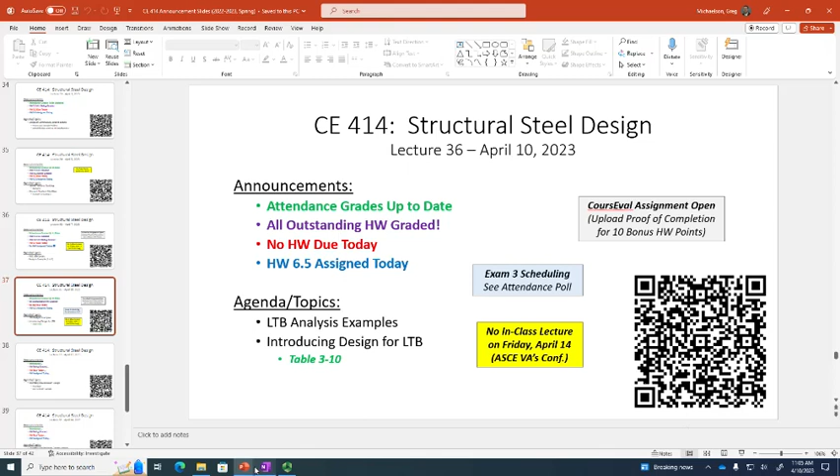Any questions? All right, so today we're going to continue our discussion of analysis for lateral torsional buckling. If you recall, what we left with last time was this flow chart we developed, and the flow chart is essentially this plot represented in equation format. So what we do is determine what zone we're in.

Based on that zone, we can compute the capacity. We've already done zone 1 problems for a long time now. That's the plastic moment, that's what continuously braced beams are, it's just phi Mp. Zone 2 is what we did last time, and today we're going to have an example on zone 3.

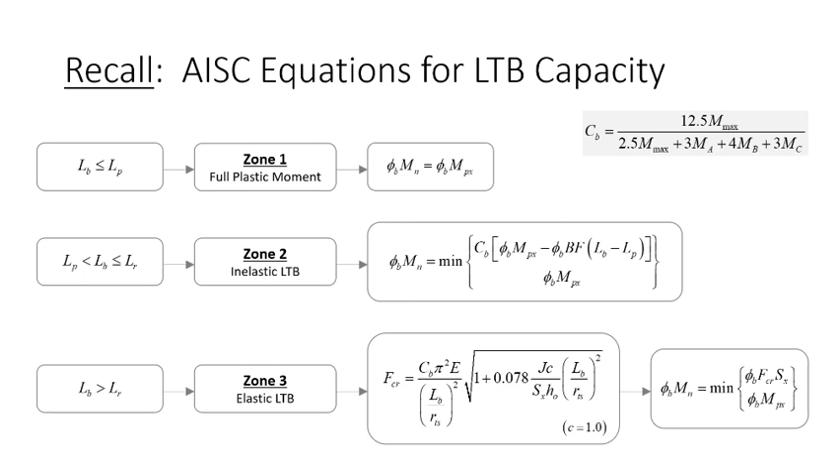Now, one note I did want to mention, and this is kind of important for conceptual understanding, is a note on LTB analysis about a beam like this. So this is a more intricate beam, there's a lot going on with this problem. If you look, I've got a beam that's overhanging, and if you notice, I've got 4 braces.

So this creates 3 unbraced segments. For each of these unbraced segments, I could have a different Lb, I could have a different Cb, and I could have a different maximum moment within that segment. I'm just using this as an example that in general, you could have a beam with multiple segments where this is the case.

So if each segment has a different Lb and Cb, then each segment has a different phi Mn, and each segment has a different Mu max. So for analysis, for evaluating that beam, you need to check all of them.

What you need to do is draw the factored moment diagram for the entire beam, compute the phi Mn for all the segments, and basically compute an efficiency or performance ratio for every segment. Now, whichever one governs is the one with the largest performance ratio or largest efficiency. But from an analysis standpoint, you need to look at all of them. Fortunately, in reality, most engineers try to exploit symmetry.

So they try and look at problems that have symmetric bracing and symmetric loading and things like that, to where you can avoid having to check all of them. But it's not unreasonable to have a beam where you might have to check 2 unbraced segments. That's not outside the scope.

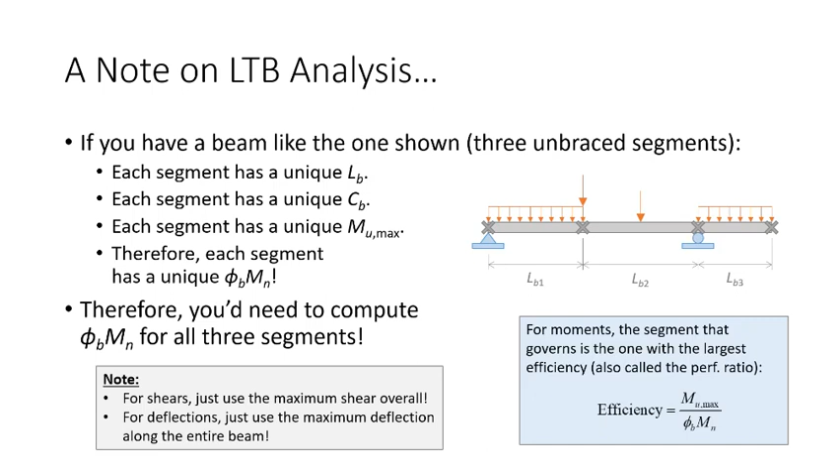Okay, what I want to do is sort of close the loop on computing capacity, and I want to look at a problem that's ultimately going to be a zone 3 problem. So I want to look at a W14 by 61, and I want to determine the flexural capacity for these situations here.

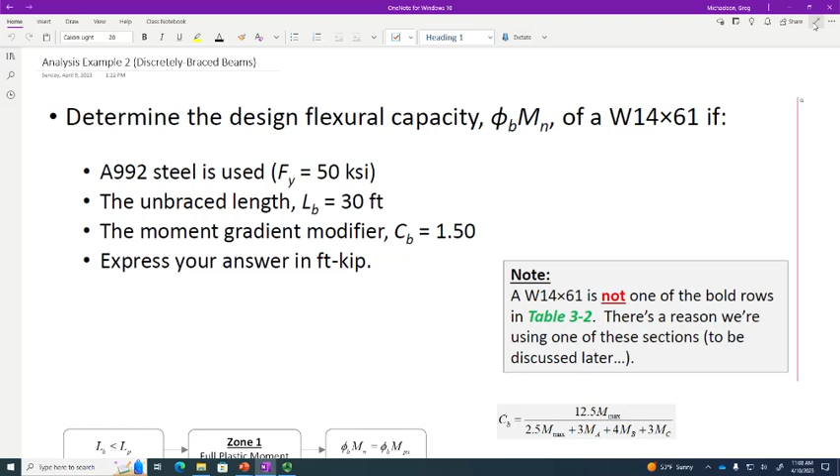So I want to look at it if we have A992 steel. I want to look at it if we have an unbraced length of 30 feet and we have a moment gradient modifier of 1.5. Now, one thing I'll mention here, let me pull this up.

One thing I'll mention about this problem is that in order to do it, we're going to need to look up several properties in Table 3.2 in the ZX charts. And I'll go ahead and tell you that the W14 by 61 is not one of the bold rows, okay? There is a reason for that. I want you to be able to get used to looking through Table 3.2 for sections that are not bolded. That might not make a lot of sense right now. It will later, and you'll see what I mean.

So we've got A992 steel, which means we can use Table 3.2 to look up LP and LR and things like that. Let's go ahead and do that. Let's go to the ZX tables and let's see if we can find the W14 by 61, and see if we can start to glean some data from this section.

So specifically what I'm after right now, let me be clear, is I want to determine the zone. So I need the LP and the LR for the W14 by 61. LP is 8.65 feet. LR is 27.5 feet. Okay, so let me write that down.

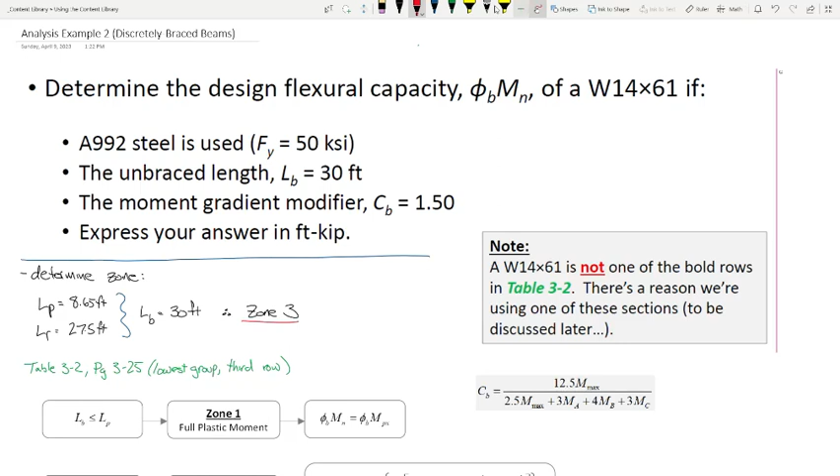Okay, so in order to compute the capacity, let me kind of make this a little easier to navigate here. So let me scroll down. So here's the flow chart. I thought, what the heck, let's just put it all here in the notes so that they're all there. So we have zone 3.

So in order to compute the capacity, we first need to compute this, okay, and then we'll go through and compute phi-mn. So this is a little bit of an involved expression, and unfortunately there's no way around it. Like if you remember, the LR equation was kind of nuts, but we don't ever have to really compute LR because we can just look it up. But this we can't really look up, we have to just get through it, okay.

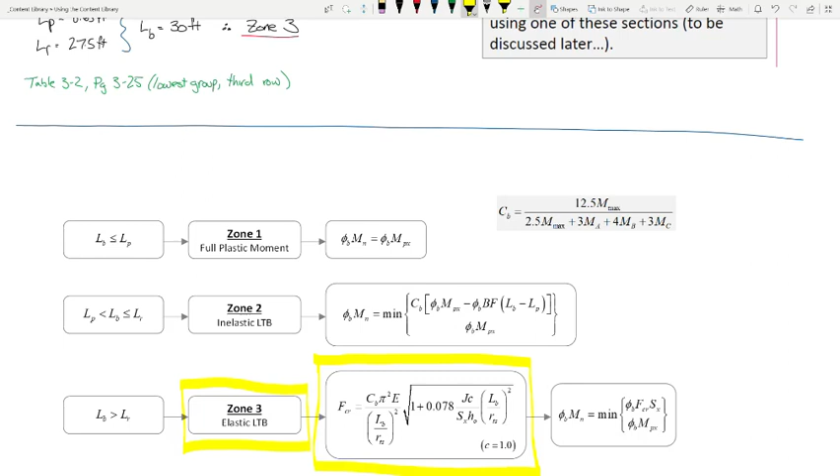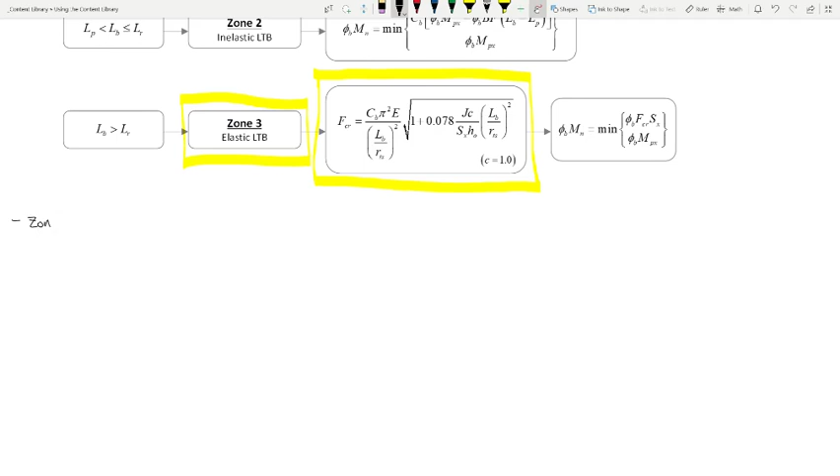So in order to compute the capacity, we're going to need a few things. So let me scroll down here, and let's look at zone 3, elastic LTB capacity.

Okay, so we're going to need our CB value, which we were given. Our CB is 1.50. Let's go through the equation. We're computing FCR, which equals all of this. Let's start writing down everything here and see what we need.

So we've got CB, pi squared, we know pi, E. We need E, E is 29,000 KSI. We do need LB. LB was given in this problem as 30 feet, but we need to go ahead and convert that to 360 inches.

And everything else that we see here is a section property for a W section. So what we need is RTS, J, SX, H naught. And all of this we can get from table 1-1.

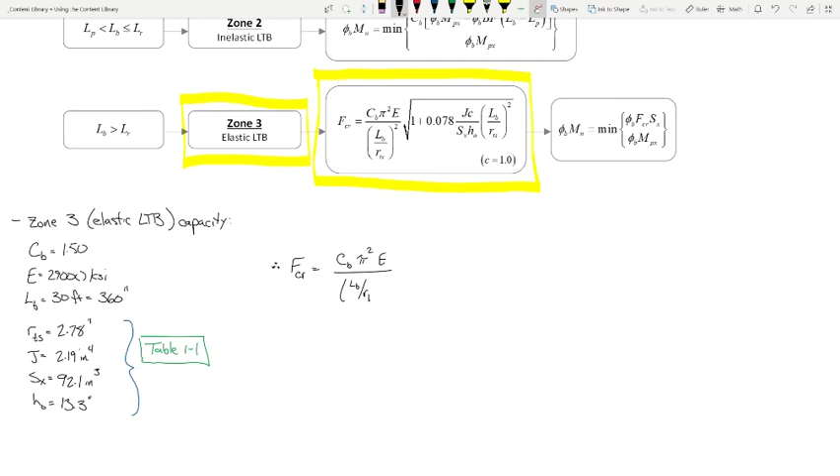So therefore, FCR is CB pi squared E over LB over RTS squared, and then 1 plus 0.078 times JC over SX H naught, times LB over RTS squared, and then the square root of all of that.

So equals, okay let's make this as neat as we can. 1.50 pi squared, 29,000 KSI, over 360 over, move this over here, 2.78 inches. Okay, and I'll do that square root later.

So 1 plus 0.078, need some brackets here, 2.19 inches to the fourth, 1.0, and then 92.1 inches to the third, and then 13.3 inches, 360, 2.78 squared. Oh, squared, don't forget to square the L over R's.

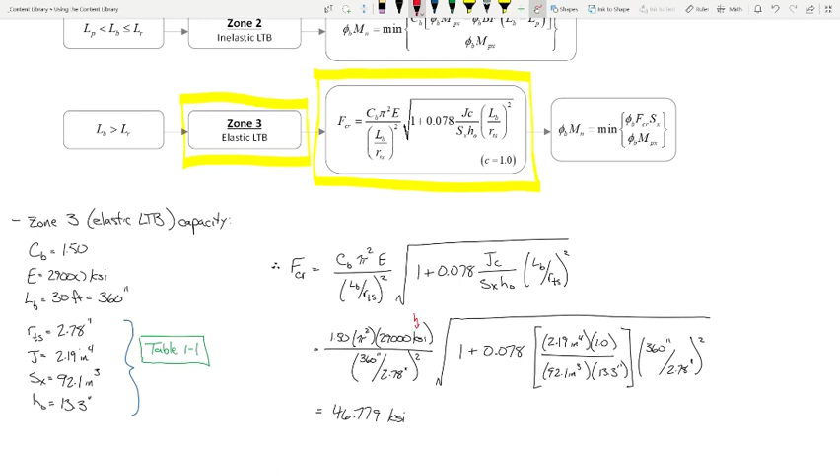So now, in order to compute the capacity, phi MN is the minimum of phi B FCR SX, or phi MP. Okay, now before we start chugging along, can somebody tell me what is phi MP for the W14 by 61? Actually, let's put that over here.

Okay, 383 what? Foot kips. Okay. So let me show you something, watch this.

So on the top, okay, we have phi. Remind me, what's phi for beams? 0.9. We have our FCR, 46.779 KSI. We have SX, which is 92.1 inches to the third. And then we have 383 foot kips. Anybody see a problem? Top's going to be in inches, the top's going to be an inch kip.

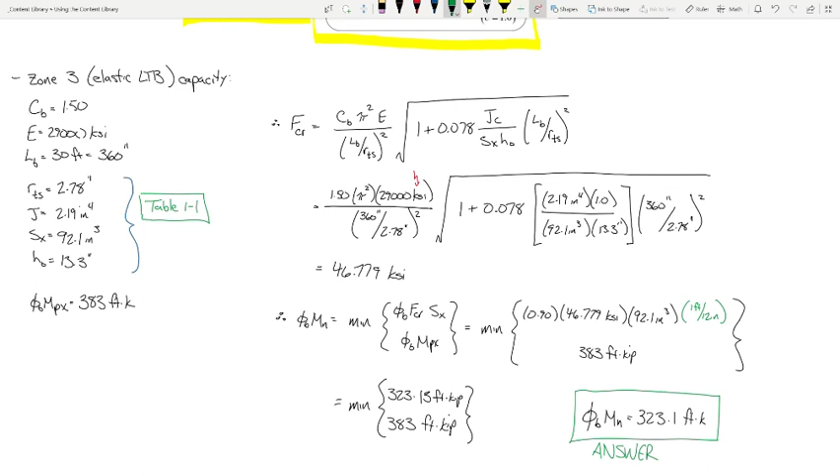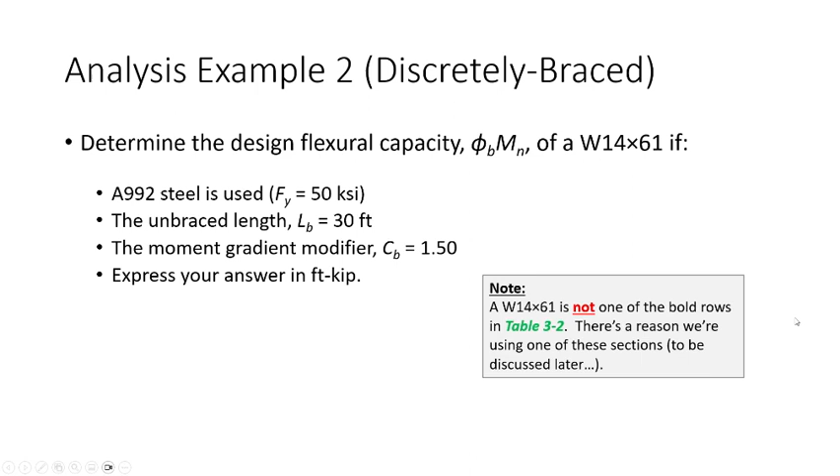Now I want to introduce you to the concept of design for discretely-braced beams. In order to do that, I need everybody watching up here, because I'm about to show you what I think is the craziest looking design aid in steel design. But it is not that intimidating, and I want everybody to recognize that. Let's take a look at this.

This is the LTB curve for steel beams. The problem is that there is a different curve for every beam. For example, I could plot one for a W24 by 76, but if I change it to a W14 by 61, now it's a completely different curve. It's the same equations, but you're going to have a different LP and LR for every shape, a different BF for every shape, a different hyperbola for every shape, and so on and so forth.

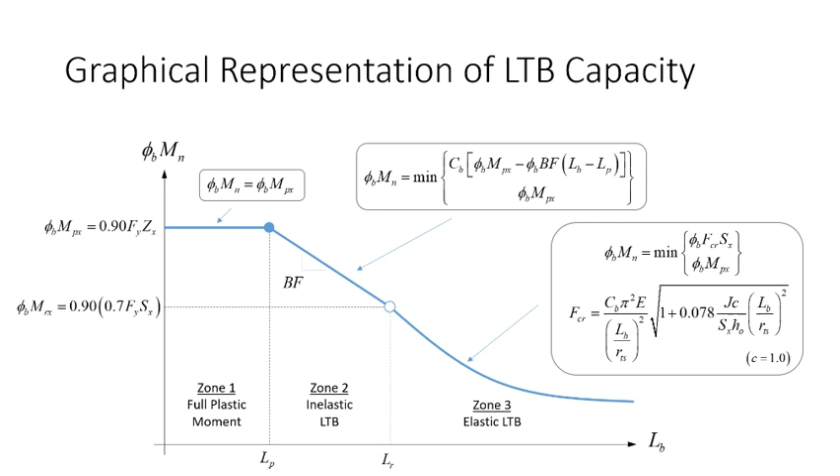This is a different problem than what we had with columns. With columns, if you had the slenderness, there was really only one parameter that defined what the curve looked like, and that was Fy. As long as you knew Fy, you could use the same column curve for literally every column. You can't do that with beams. For beams, you're going to have a different LTB curve for every beam. So with columns, we needed the capacity tabulated in order to design, but we can't really even tabulate it very well because of this. So how do we design beams if each beam has a different curve?

What we do is we use a design chart that has all the curves plotted together. This is Table 3-10, okay? And it looks like a mess. It looks nasty. It's not. It's actually not as bad as you would think, okay? This is Table 3-10, a little bit about Table 3-10.

So first off, this is another one of those bookmark type tables. Everybody ought to open up to it because we're going to have a little quick exercise working on this together. This is one of those guys that I think everybody kind of needs to have some experience with, okay? While you're turning to it, it starts on page 3-92, but the guide goes on for several pages. So as I was saying, with the column curve, it was only a function of the slenderness of a shape, whereas for this, it's a function of a lot of other things.

Okay, so the way that this works is that on the x-axis you have your LB, and on the y-axis you have your plotted capacity. Now notice how there is a scale for ASD and one for LRFD. We're only going to focus on the LRFD numbers.

One thing worth mentioning is that in order to use this design aid, two things have to be true. The first thing is you have to be dealing with 50 KSI steel, which for W shapes is a very valid assumption, not a big deal. But what is the other thing that has to be true to use this aid? CB has to be 1. CB is not 1 in every analysis case.

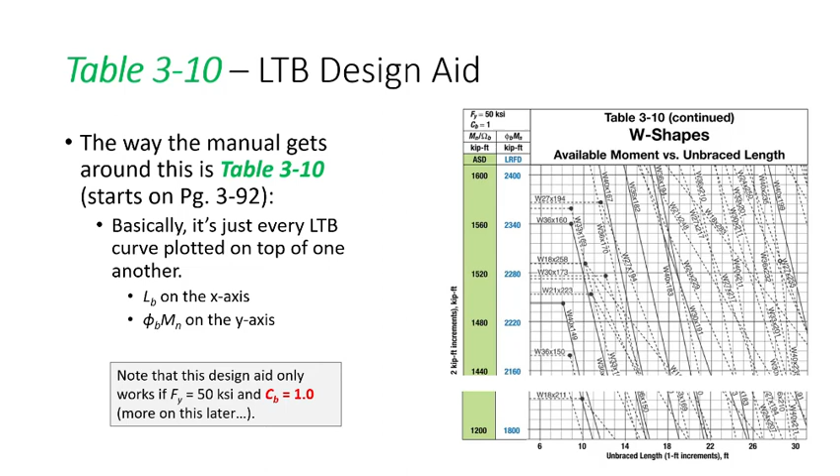Let's talk about how it works. Okay, I want everybody's eyes up here because I've got some slightly animated slides, which I think will be an easy way of explaining it.

So here's how you use the table. At the very beginning of a design problem, the first thing you're doing is some structural analysis, computing MU, VU, all that.

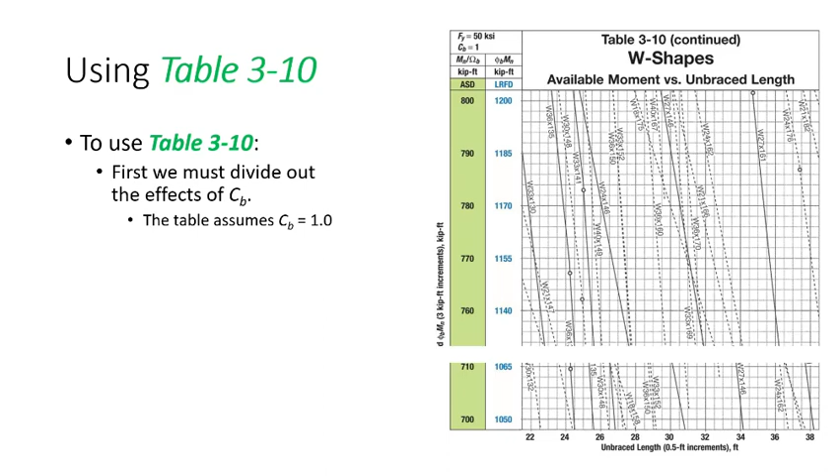The first thing you do is take that factored moment and divide out the effects of CB. So if you have a CB value of 1.3, you compute your factored moment and divide it by 1.3 so you have a moment to go into the table with. You look for the point where the x-coordinate is LB for your problem, and the y-coordinate is that factored moment divided by CB.

Then you look up and to the right, and you find the first shape that's plotted with a solid line. Let me show you how this works.

For example, let's say your unbraced length for a given problem is 28 feet, and let's say your MU over CB is 1162. I just made these numbers up. You look up here and find that point - this is an unbraced length of 28 feet, and the factored moment is about 1162.

From there you look at this region. The reason you're looking up here is because every shape in this region has a higher moment capacity and a longer unbraced length, so these would be safe sections to select. What we couldn't do is find this point and start picking shapes down here, because they don't have enough capacity. Does that make sense?

So what you then do is look up and to the right and find the first solid line. Why the first solid line? Look right up here - I want to take a look at these shapes. This is a W18 by 175, this is a W40 by 167, and this is a W27 by 146.

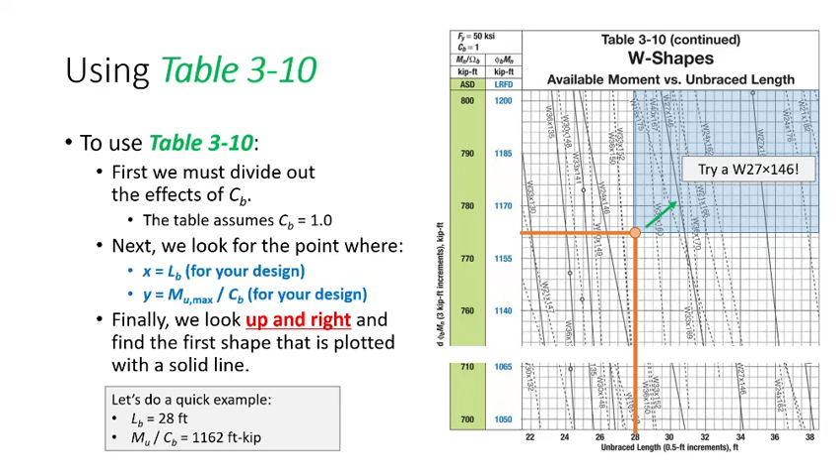That's what happens when we have so-called high CB values - we can get some false positives. We'll see that in the pre-recorded lecture on Friday, but I wanted you to see how this works. For the rest of today, I'll probably let you out a little early after this, but I want to make sure everybody's comfortable with this. So I want you to help me out.

LB is 14 feet, MU is 2150. Find me the section that works.

And I'm here, so if you have any questions - this is what we're here to do.

One thing you kind of have to get used to is reading the labels. Sometimes it can be a little tricky with this aid, and there's sort of no real way around that. I will turn to the same page and see.

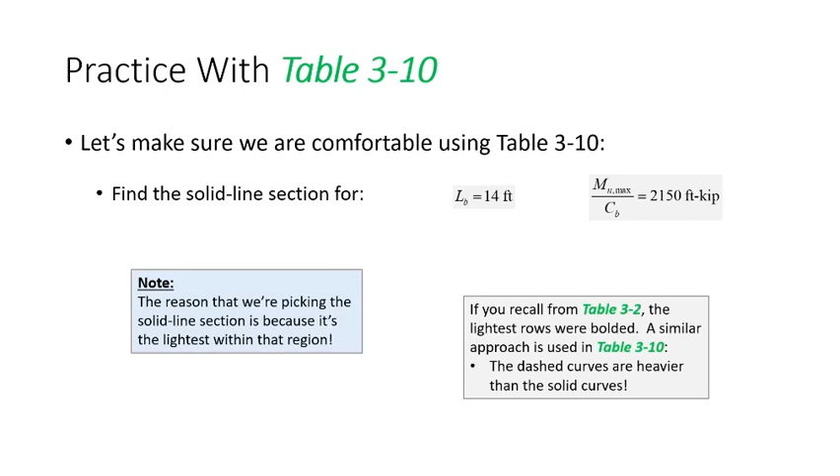So far so good? Okay, I want to show you all something, and I don't normally bring this up, but I kind of want to show you this because I want you to understand what you're getting on the exam. And by the exam, I'm referring to the FE exam, okay?

So, I think that, let me see. I think this will probably be it.

Yeah, here we go. So this is the reference handbook that you get on the FE exam. I think this might be a slightly older edition, but for the sake of discussion, this is good enough. So how many of you have ever looked at this before? Good. If you haven't, you should. This is the reference handbook that you're allowed to use on the FE exam when you take the test.

Now, I'll be honest, a lot of students say, oh, I don't need to look at it because it's a searchable PDF and I can just hit Control F. But I do think it's a good idea to at least orient yourself to what's in it. I'm not saying you need to memorize it, but at least knowing what's there and what's not will definitely help you out. I think we're at a good spot now that we could probably look at the steel design portion to show you what it looks like.

So the way the book is structured, you have the stuff that's general to everybody, and then you get into individual content for each major. So there's chemical engineering, civil, environmental, etc. Let's look at the civil engineering section.

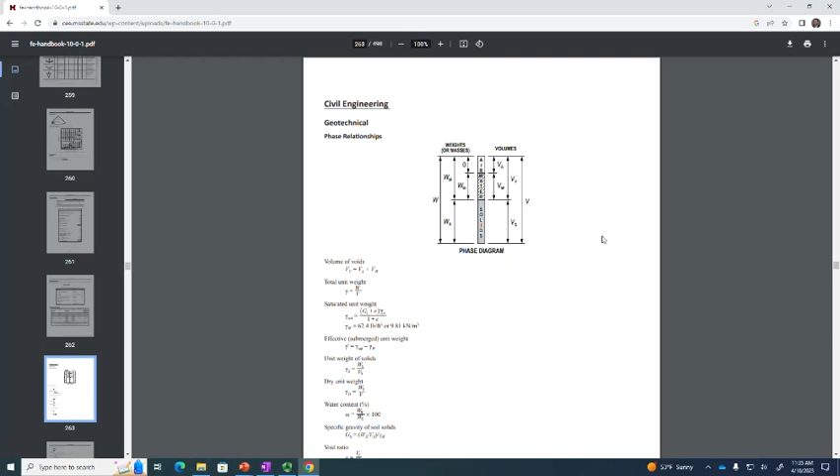So if you look at the civil engineering section, first off, some of this stuff probably is a little familiar, right? Air, water, and solids. What's the weight of the air? The weight of the air is 0, right? You remember that stuff? Porosity. You're like, we were having a good day. No, I'm just kidding. No, I love soils.

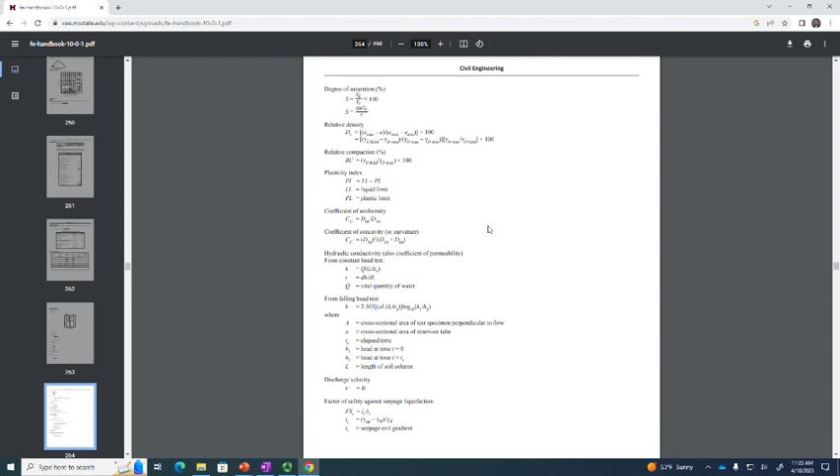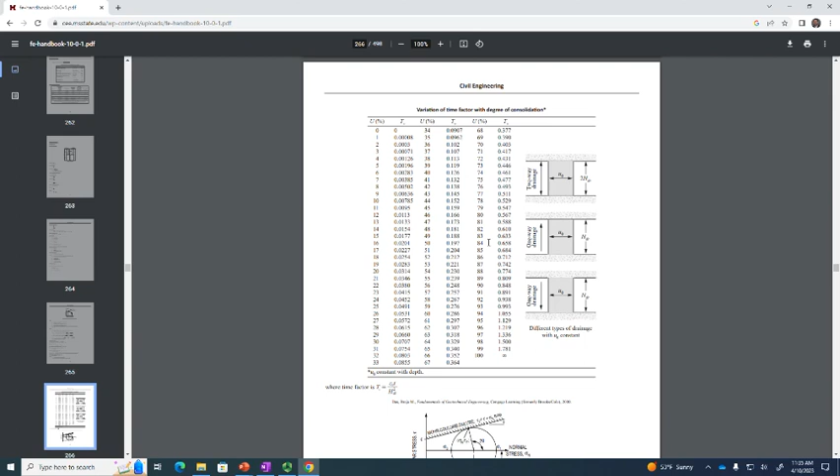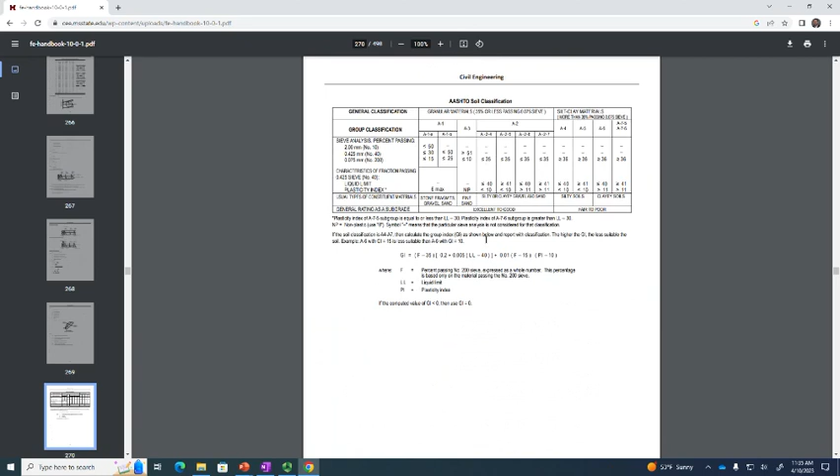But so we get into coefficient of uniformity, and then we get into consolidation. We get into time factors with consolidation. I'm not sure if you cover this in soils or maybe in a foundations class, because it can get a little, I'm not sure where that is. Mohr-Coulomb failure criterion, lateral stress, soil classification. Here's AASHTO, here's ASTM.

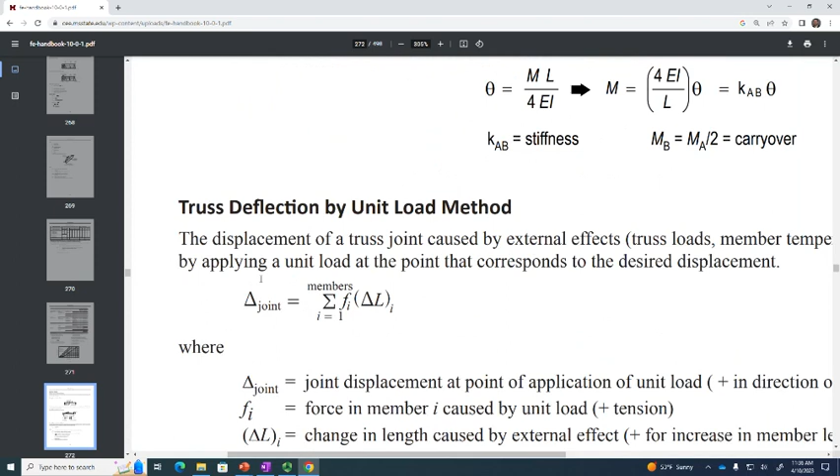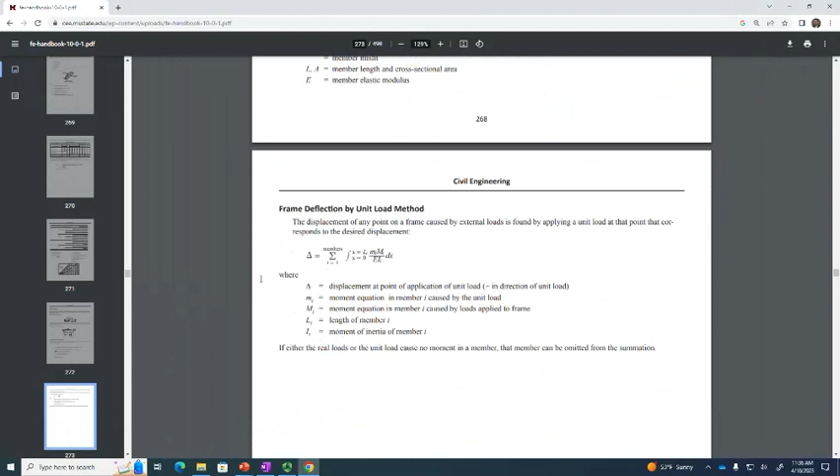Okay, my neck of the woods, structural analysis. So a little bit on influence lines and then truss deflection. Y'all remember that stuff, right? It's written a little differently, but remember how we had a little f, big F, L over EA, and we sum all that to get the deflection in a truss. So yeah, it's written a little different, but it's not all that bad. Like we did that before in structural analysis. See, this stuff's given to you.

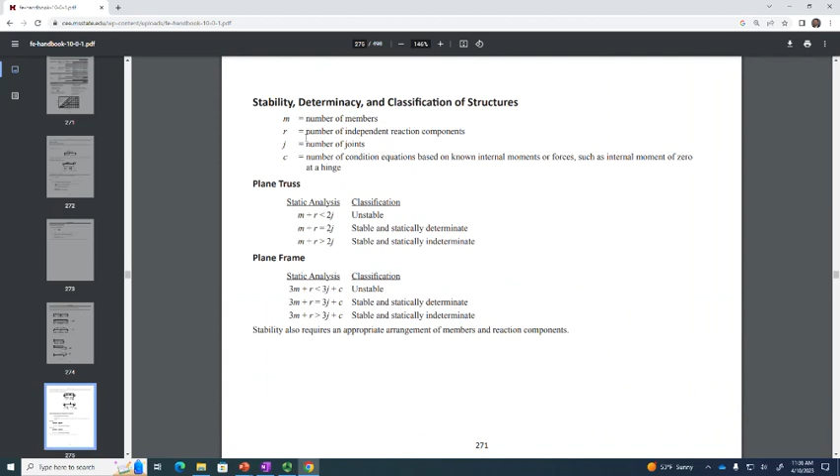All right, we have a little bit of stuff on indeterminate analysis. This is on determinacy, whether or not structures are indeterminate, unstable. Again, written a little differently, but it's all the same stuff.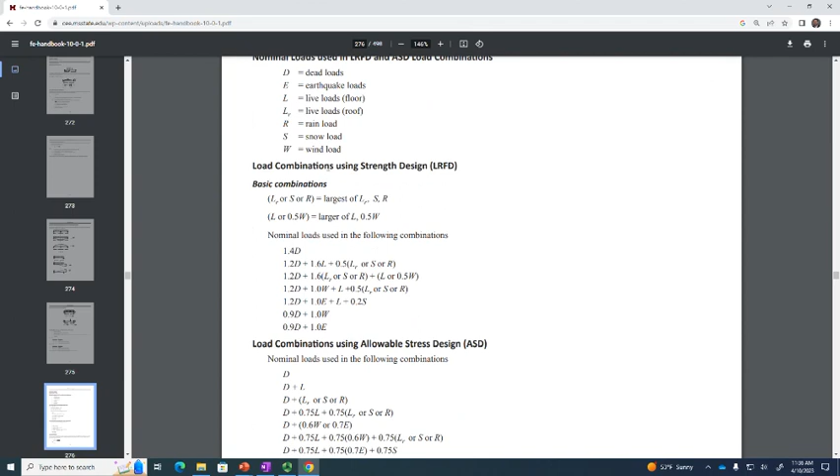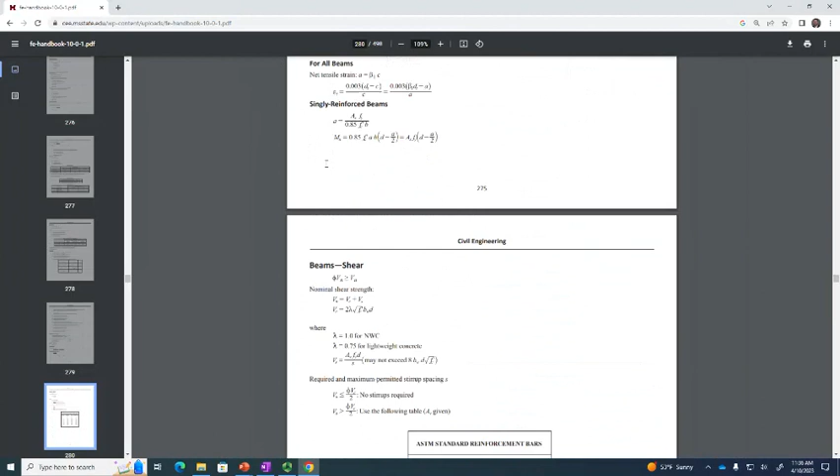Okay, now we're starting to get a little bit closer to our neck of the woods here in steel design. So the first thing you'll see is all our load combinations for LRFD. You see some stuff on roof loads and wind loads, but it really doesn't get too hairy on the exam. Concrete design I will skip, but for those of you that have had concrete design, some of this stuff is probably pretty familiar. Like you've probably seen these before, you've probably seen beam column charts.

Okay, let's get into steel design. Now we're in the land of our specific class. So the first thing they show you is the yielding equations, and then we have lateral torsional buckling. Like for example, here's our CB chart. Columns, so you can see, we used all that stuff in here.

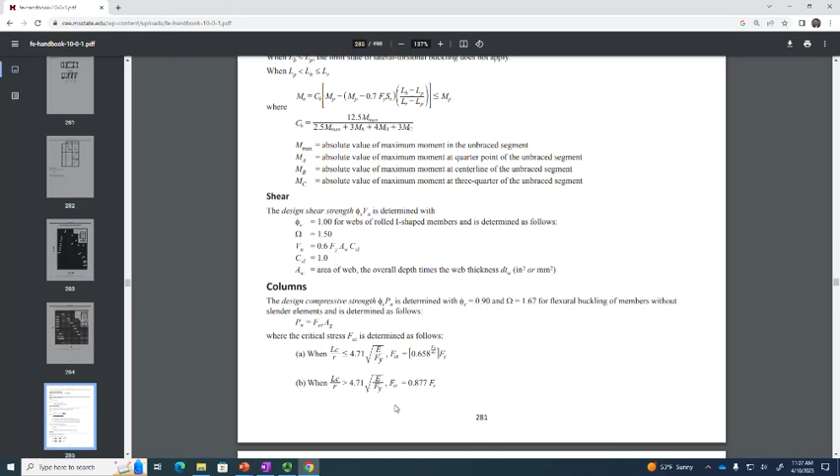Here's the CB chart that you all have been using this semester, right? That's all present in the manual. Tension members - we have net area, effective net area, and all that.

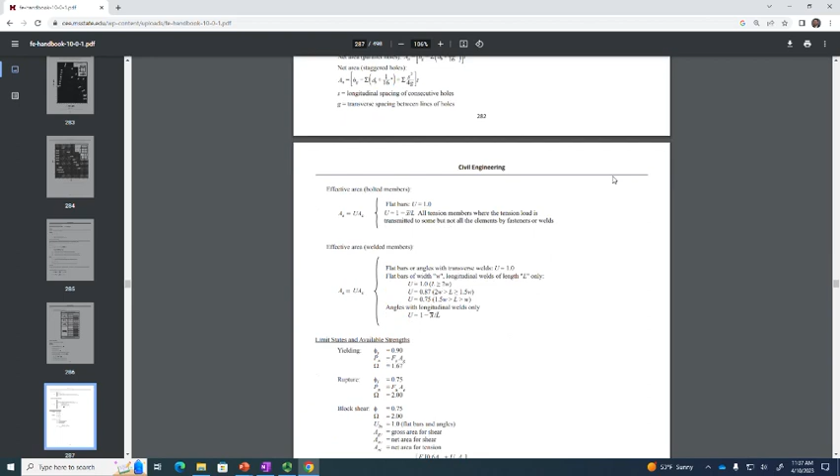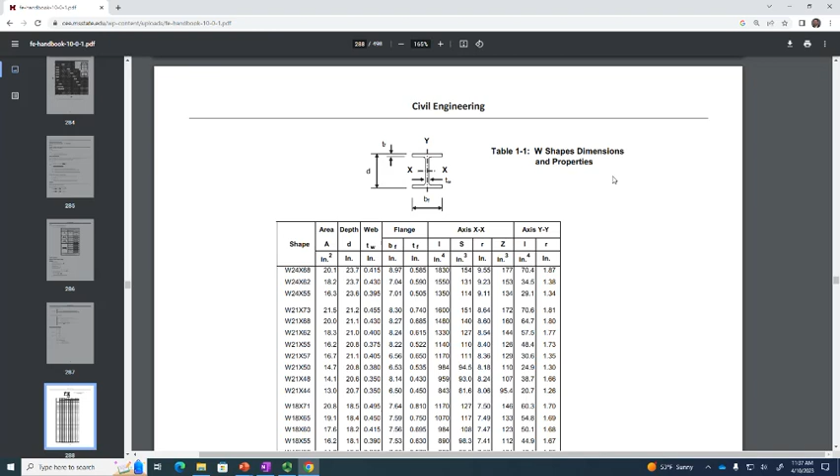Okay, what actual design data do they give us? One thing they give you is some snippets of W sections. They'll list the area, the web depth, the flange properties, the moment of inertia. They don't give you everything, just enough that you need on the exam.

So what's the next thing they give you? Look at this, ZX charts. They're that important - you desperately need them on the exam. Notice how they're grouped in the same way. The one thing that's noteworthy is there's no ASD, no green numbers and blue numbers. They just use LRFD, so you just see the phi Mp, the phi Mr, the phi BF. You don't see the MP over omega, the green numbers - they're all gone.

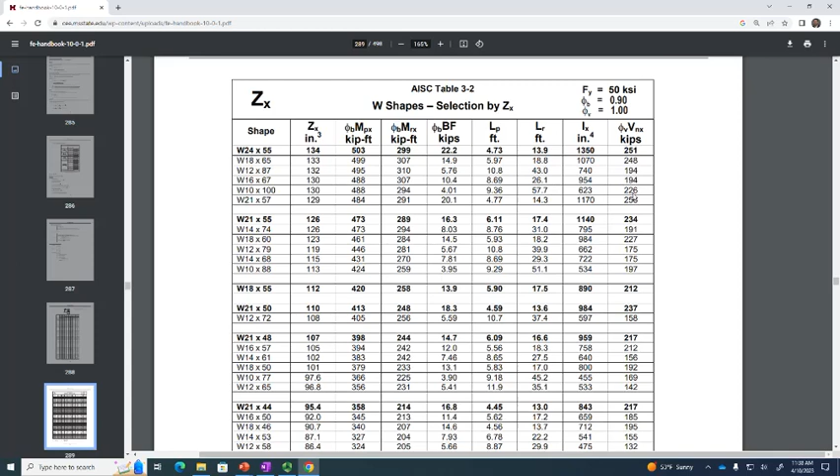Let's see - do you think in future manual editions the ASD will just be gone? Do you think the ASD will ever be gone from the manual? Ooh, that's a good question.

I'd be all right with that, and not because of some personal preference towards one philosophy or the other. To be honest, LRFD is harder, it is more difficult. The reason I prefer it is because the concrete industry has said that's the only way they're doing it. In AASHTO bridge design, that's the only way you can do it. Steel is one of the few lingering - even the timber design spec now has LRFD. While they still have ASD as well, they're even moving down that road. Steel is one of the few industries that's lagged behind, and the reason is there's a lot of folks out there that have been using ASD this whole time and don't really want to change. Do I think LRFD will go away, or ASD will go away? Yes, I think it'll take some time.

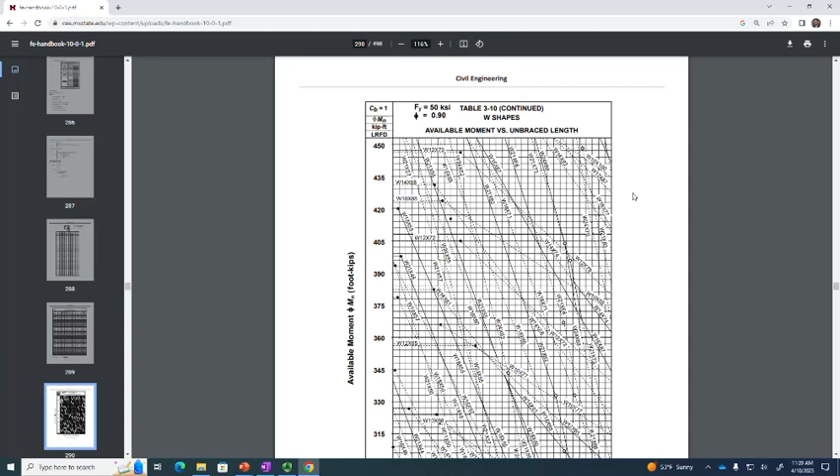So, these are the charts you saw here. They only include one page - notice how they only include one page of ZX charts, only one page of the beam capacity charts. But you can see it's formatted the same way. They include the K values.

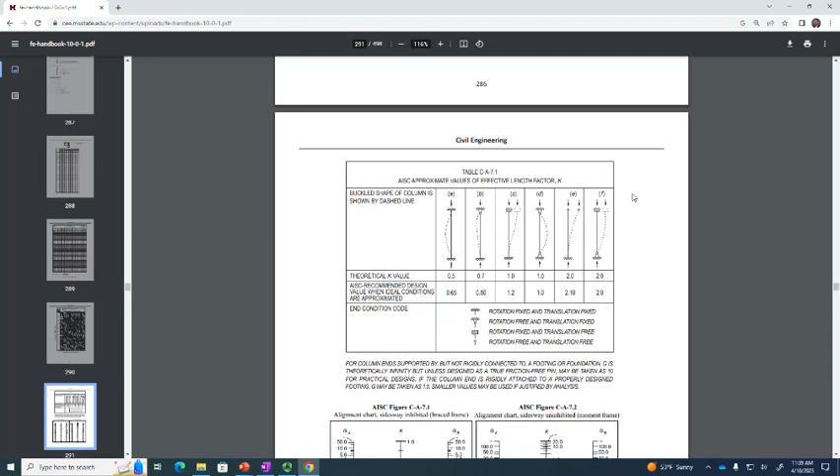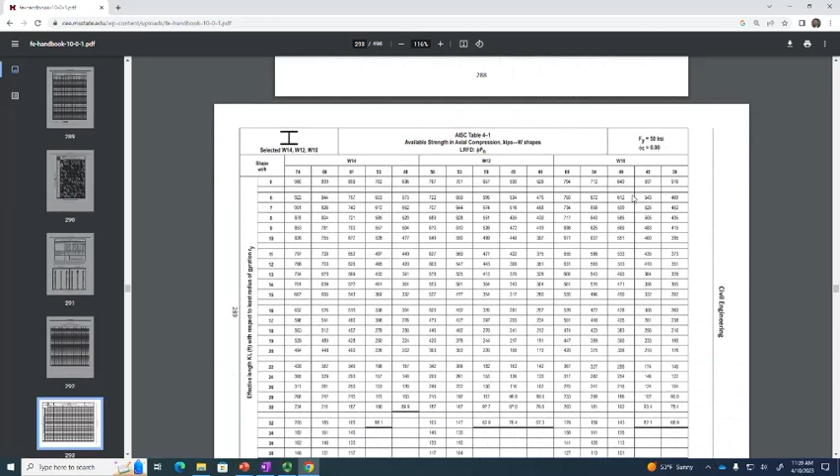We didn't use this semester, but you should be able to - you'd be just fine with these. This is just another way for computing K. We didn't use this chart for computing K or the critical buckling stress for columns because we computed it directly, but we did use this. This is table 4.1 where it lists the capacity per length. It just looks a lot different because there's no ASD and LRFD numbers - it's just LRFD. So if we have a W14 section that's 14 foot long, we can find a shape, a 12 section, a 10 section. Again, they didn't include everything, just enough to navigate these sections of the manual.

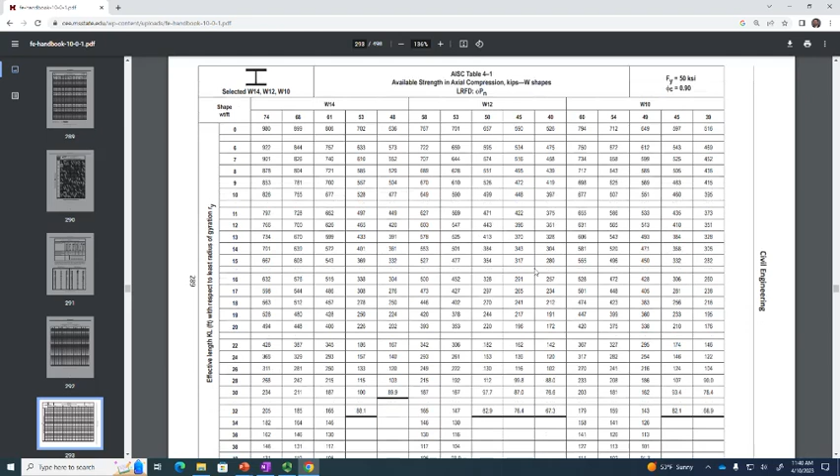And you can go past it - there's also a lot of other cool stuff in here about hydrology, transpo, surveying, curves, horizontal and vertical curves - all that stuff I've looked at a long time ago, but you all looked at probably yesterday. I do think it's worth mentioning.

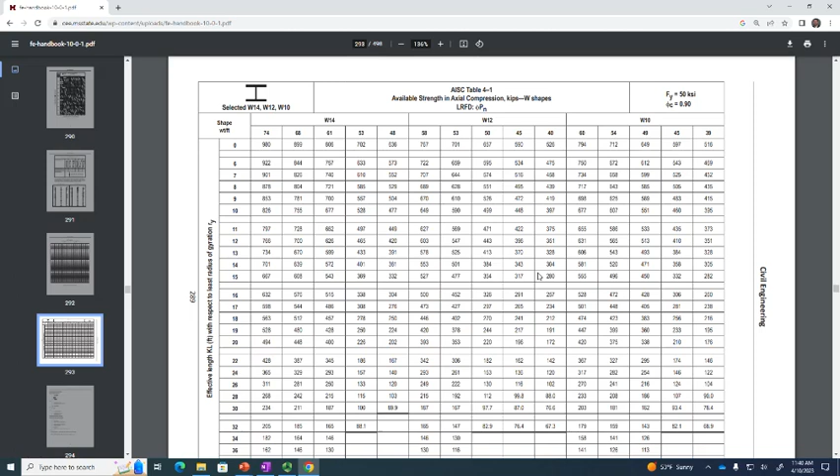But the point I've been making is that the stuff I've been trying to show you is what you need in order to do steel design. I also want to make sure you're learning methods that are also present on the exam. So, everybody comfortable with table 310?

All right, here's what we're going to do. On Wednesday we're going to start doing some discretely braced beam design - we are doing CB, design for what I'm calling low CB value design. What I mean by low CB values is that we will not require a whole lot of iteration - high CB values, we will. There's no real way around that, you'll see what I mean when we get to it. But if you're comfortable with table 310 and with everything we've done so far, then discretely braced beam design won't be all that hard.